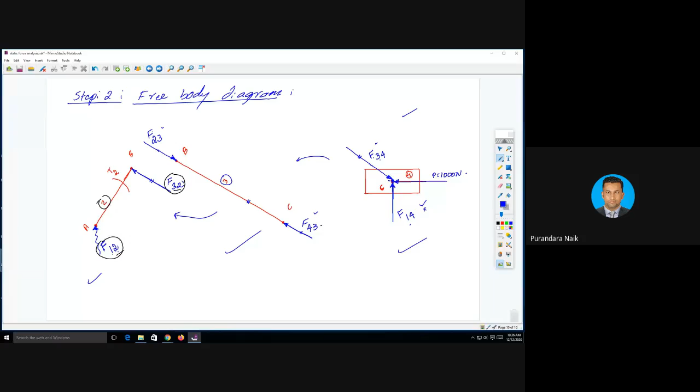In the previous problem, look at this: the force due to link number 3 on link number 2, we have shown it along the direction of link 3, because there was no force in between on link number 3. So that's why I showed F32 directly along link number 3. But here we cannot do that, because we have the extra force Q on link number 3. That's why the force due to link 3 on link 2 will not be along the direction of link number 3. It will be somewhere away.

So I'll show this force. I don't know the direction and I don't know the magnitude. F32, that is the force due to link number 3 on link number 2. Why have I shown the zigzag line? Because I don't know the direction or the magnitude. Why don't I know the direction? Because there is an extra force acting on link number 3. That's why I cannot identify the direction of F32 or F23. So it is an unknown direction.

20 degree. Yes, 20, exactly. I will take a 20-degree angle. So just take a reference line anywhere; you can take it anywhere, no problem. After taking the reference line, please concentrate on this problem, otherwise it will be difficult; it is somewhat complicated. I'll mark a point here and draw a 20-degree line.

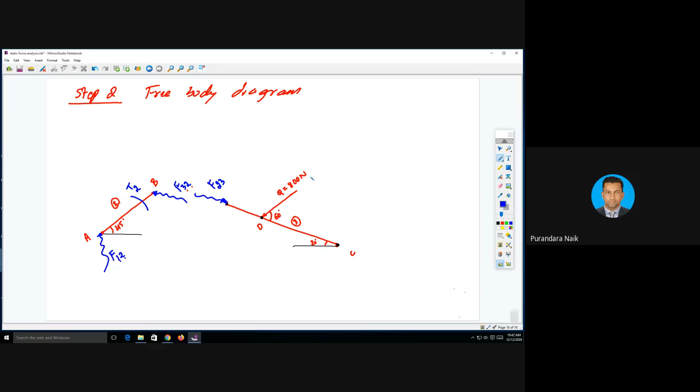If there is no Q, then C would be in the direction of link number 3, right? Like this. But it is not like that, because we have extra force here. That's why here also we have an unknown force F. Which link is connected to the point C? Link number 4, right? You see the previous slide. Link number 4 is connected to C.

So what is the force acting on link number 3? That is F43, force by link number 4 on link number 3. I don't know the direction, I don't know the magnitude. So zigzag line. It is similar to the previous problem, but due to Q, the direction of F23 and F43 will be unknown.

Copied? Hello? Hello? Finished? Yes, sir. Okay. Any doubt? Any doubt?

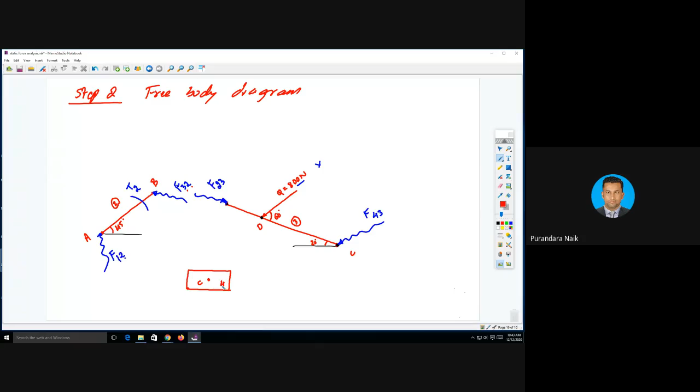What else is remaining now? Piston is remaining, right? Fourth one. So I will draw the piston now, fourth link. Yeah, this is the piston. Link number 4, and the point C is here. Now, what are all the forces acting on this link? One is P, applied horizontal force. What is the P value? P value is 2000, right?

2000 Newton. Another force: here you see the link number 3, we have F43. The same amount of force, opposite force, acting on link number 4. That is also unknown direction. I will show it as unknown direction. Look at this. You can show it anywhere, no problem, because it is unknown direction. So F34, due to link number 3 on 4.

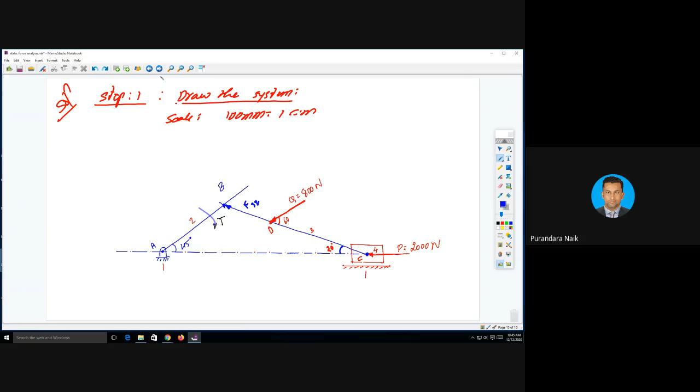Next, one more force, the upward force. We will be having one more force in the upward direction, exactly vertical. So I'll show it in the free-body diagram. This direction is known. What is the force? This is the force due to link number 1 on link number 4, F14. What is the indication of F14? Force by link number 1 on 4.

So this is the free-body diagram of link number 2, link number 3, and link number 4. I have shown all the forces and their directions. Right? Here, look at this. We know the direction of Q, direction of P, and direction of F14. We know the magnitude of Q and P, but all other directions and magnitudes are unknown. We need to start solving the problem. Unknown things we need to find out.

Because what is the target? You need to find out the value of T2. To find out T2, we need to find out F32 and F12. If you know F32 and F12, you can find out T2. Because link number 2 is a two force member with a single torque. What is the condition for two force member? Both forces will be equal, opposite and parallel. So F32 is equal to F12.

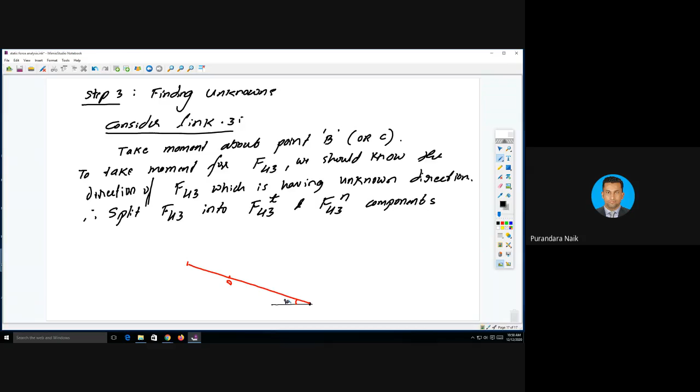This is a point. 20 degrees, correct? 20 degrees, 6 centimeter length. This is 2 centimeter, D. Correct? So this is B, C. Okay, so we have unknown force zigzag. This is F23, correct?

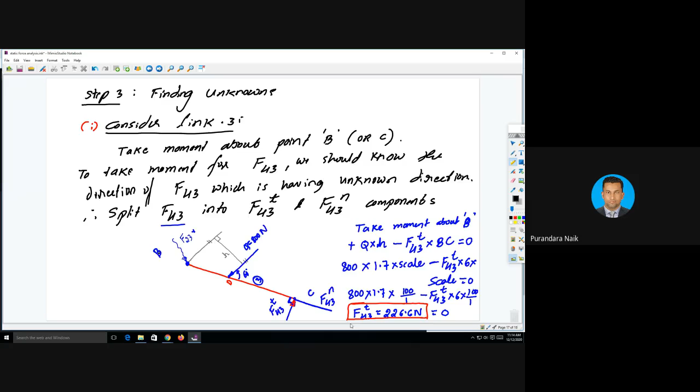Normal component is always along the direction of link. So this is the horizontal line, right? You just draw the horizontal line. See, normal component. Where is the normal component? Along the direction of the link number 3. So here also in the fourth link, along the direction of the link number 3, which is nothing but 20 degree, correct? Draw 20 degree line.

So this force, I know the direction, but I don't know the magnitude. So this is the direction. But I don't know exactly whether it is upward or downward. Just leave it. This is F34, not F43. The previous case we have taken F43. But here it is acting on link number 4. That's why it is F34 normal. This direction is normal. Here also it is normal. Same direction.

Now, where is the tangential? See, tangential component is perpendicular to normal, right? There it is upward. In this case, it is downward. Downward means like this. This is F34 tangential. Why it is downward? Because it is perpendicular to F normal.

What I'm going to do is I'm going to take a piston. I'll show F14 in the upward, P in the horizontal direction. Next, I'm going to take a horizontal line. Then I'll take a 20 degree line because it is the indication of link number 3. Then I'll take F34 normal along the direction of 20 degree line. Then I'll take one more force that is perpendicular to normal, that is F34 tangential.

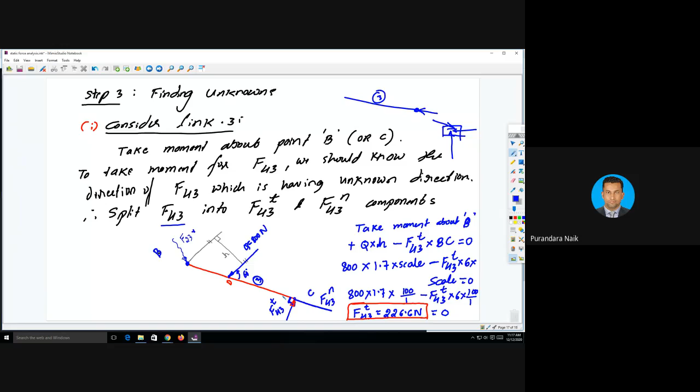Why is the tangential downward? Because it is opposite to F43 tangential. Why? Because it is reverse, right? In the previous problem, link number 3 and link number 4 are like this. Previous problem, you just check it. So if the force is acting like this, then in this fourth link it will be opposite, correct? So same thing I'm going to do. Here it is upward, I'll take this downward in this case. But normal force, I don't know the direction, you just leave it. Any doubt in this case?

I have split F34 into tangential and normal, by referring to the previous link, link number 3. Link number 3, we have shown F43 normal, F43 tangential. Same thing we have to copy, but direction is different. That's all. Any doubt in this problem? Or in this case? Hello? Any doubt in this case?

ಯಾರಾದ್ರೂ ಮಾತಾಡ್ರಾ? No, sir. Any doubt? ಇದೆಯಾ? ಯಾರೋ ಮಾತಾಡ್ತಿದ್ದಾರೆ, don't hesitate. If you have any doubt, you can ask. I can clear it. ಋತ್ವಿಕ್, any doubt ಇದೆಯಾ? No, sir. No. Shall we proceed?

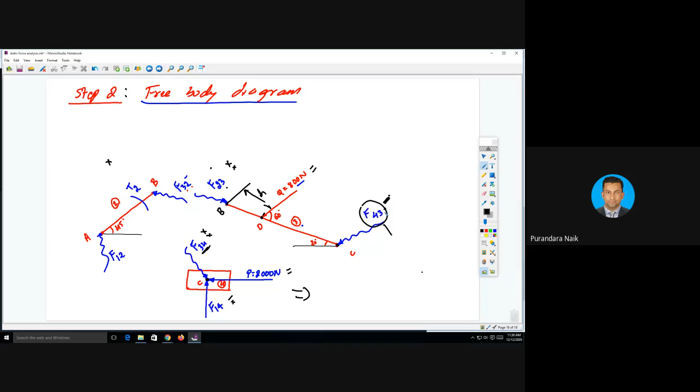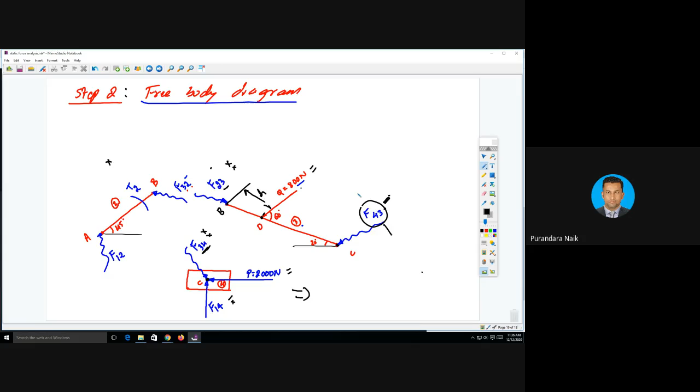You go to the previous slide. F34 is known. F34 is nothing but F43. If you know the value of F43, direction is same as F34, direction and magnitude. If you know F43, you can find out F23 because link number 3 will be a system with three force members: this, this, and this. So you know how to do the equilibrium for a three force member, right? So I'll do it.

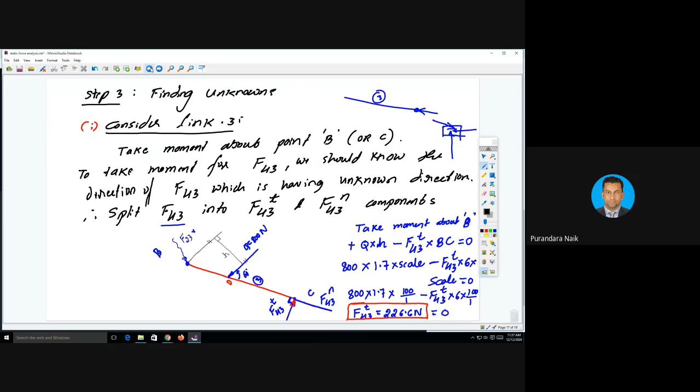Step 3. Consider link 3. We need to consider link 3 again. So F43 is equal to F34 is equal to, what is the answer for F34? 2250 Newton. What is the direction? Here it is upward. Why? Because in the fourth link it is downward, but in the third link it will be upward. Okay. Now you come back to the third link, link number 3.

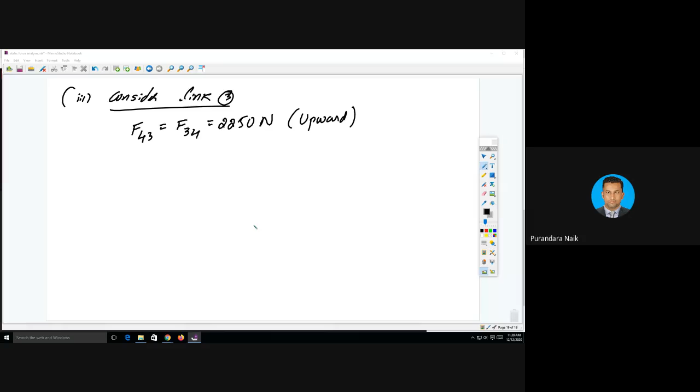So this is link number 3. B, this point is C, this is 20 degree. The length is 6 centimeter, right? This is C. We have a force F43, upward. So what is the angle here? Just measure the angle. How to measure it? Just draw a horizontal line and measure this angle. Check it. Theta. What is the answer for theta?

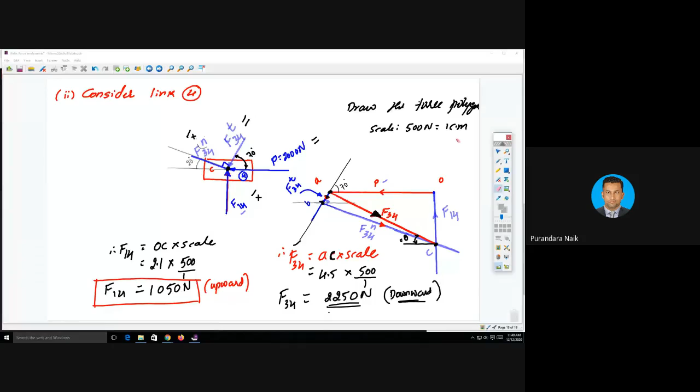Saiban, can you tell me the answer? Yes, sir. Doing, sir. Manjunath R. Manjunath is there? Jitesh? Jitesh, am I audible?

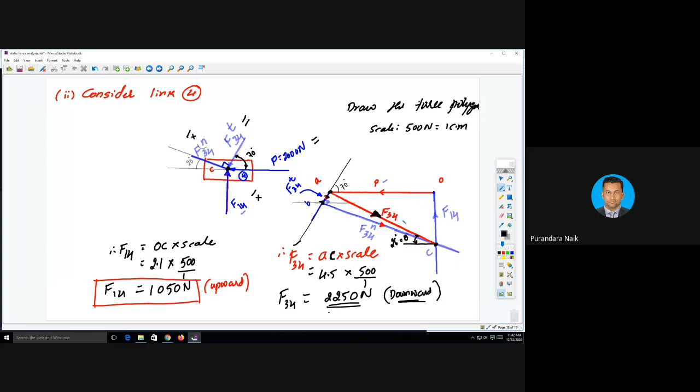Okay, can anyone tell me the answer for theta? 26 degree. Okay. I'll take 26 degrees. Here D, this is D, 60 degree. So here I don't know the force. This is F23. Here I know the force, that is F43, at an angle of

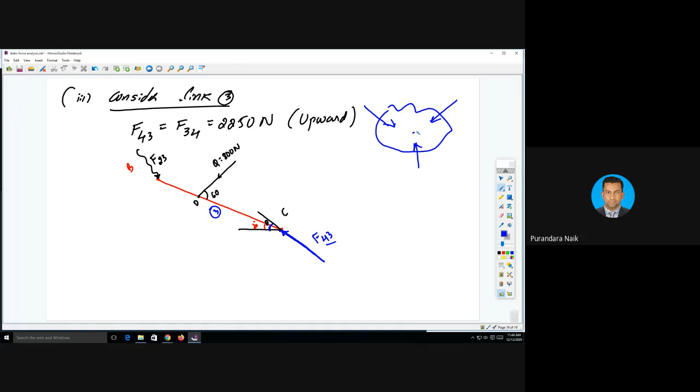Okay. Now, in this system, link number 3 is a 3-force member, that is F43, Q and F23. A body with 3 forces. What is the condition? Here we have 3 forces. These 3 forces must be concurrent at a point; they have to intersect at a point. What is the second condition? Summation of all the forces must be equal to 0. If these 2 conditions are satisfied, then the system will be in equilibrium.

Here we have 3 forces. We need to find out the point of concurrency. How do you find out the point of concurrency? Look at this, I'll do it. I'll extend this line. Which one? F43. Okay, write down below this: link 3 is a member with 3 forces.

Therefore, for equilibrium, all 3 forces must be concurrent and summation of all the forces must be equal to 0. That is, the force polygon must be closed. So if you apply these 2 conditions, we'll get the value of F23. Okay, how to find out the point of concurrency? Write down below this: to find the point of concurrency, POC.

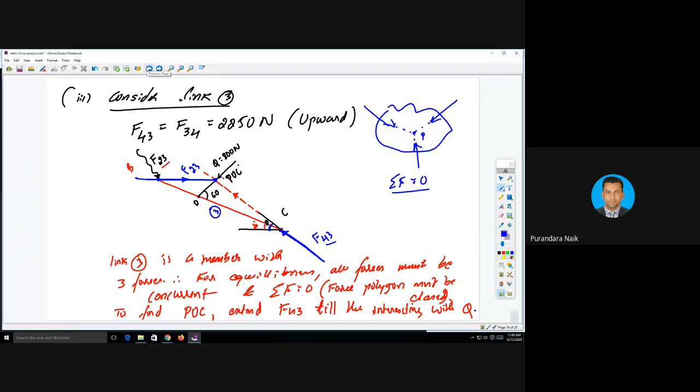What is the scale you need to take? Q is 800. F43 is 2250. 2250 means 500 is equal to 1 centimeter. First, F43.

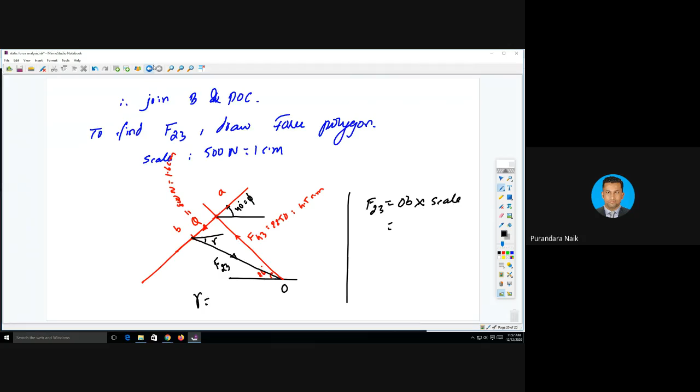Hello? OB length? 5.4. 3.4. Exactly. 5.4. Huh? 5.4. 5.4. Okay. 5.4.

Into scale is 500. Answer F23. 2700 Newton. Yes, sir. Correct? This is actually downward, right? Downward. So next step, all of you copied?

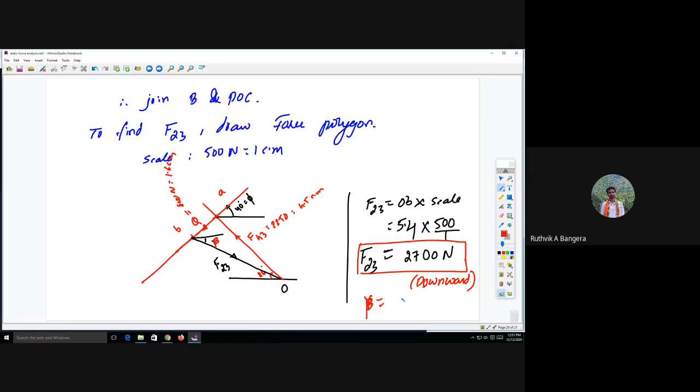Now what is the gamma angle? Angle gamma is very very important here. What is the angle gamma? Or you can take it as beta, no problem. Gamma or beta, no problem. I'll take it as beta. Okay, what is beta angle? What is beta? 11 degree. Okay.

Next, so here we have a force, right? F. This is link number 2. F32 is equal to F23. So therefore, write down F32 is equal to F23. F23 we have found, that is F23 is equal to 2700. F23 is equal to F32, but it is opposite in direction. Downward, so it is upward. Because here we have taken it as downward.

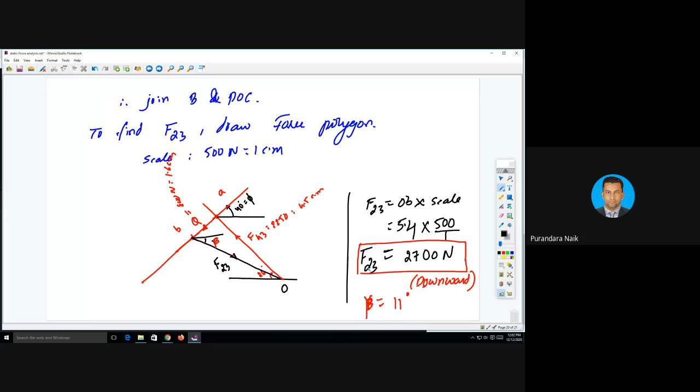It is upward now. So F23 upward means, I will take a reference line here on the vertical line. Horizontal line. So gamma or the beta is 11 degree. Take 11 degree line. So this is my 11 degree line. Take beta is equal to 11 degree. So this is the force F32. It is opposite to F23.

So here we have a torque T2. And we have one more force, F12, but it is a 2-force member, right? Write down the comment here. Link 2 is a member with 2 forces, F32 and F12, and a torque T2. What is the condition for static equilibrium? A member with 2 forces and a torque, same as the previous problem. These two forces are equal and opposite.

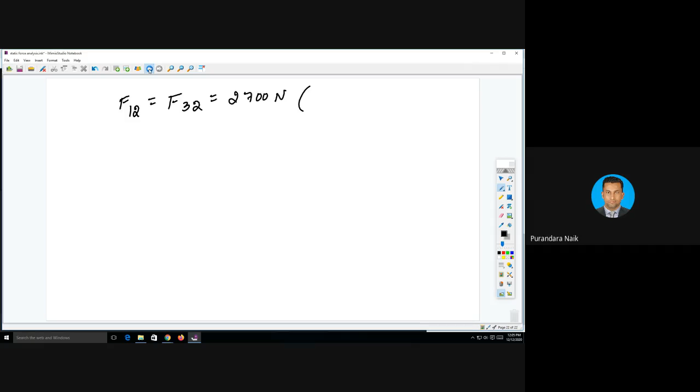F32 and F12 are equal, opposite and parallel. Correct? Equal, opposite and parallel. Therefore, you can write it as F12 is equal to F32 is equal to 2700 Newton. F32 is upward, F12 is downward. Correct? Please copy this, do it fast. Only the first 2 steps are important, then you can continue.

Finished? Next, second condition: the couple formed by F12 and F32 is given by, C is equal to F12 into H1 is equal to F32 into H1. What is the value of H1? How to find out H1?

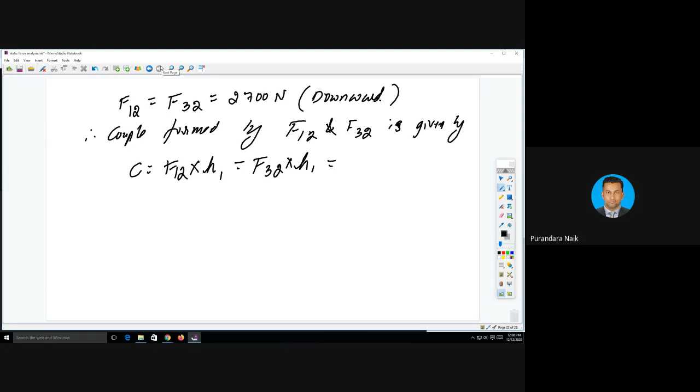F12, what is the value of F12? It is 2700 into H1 value. Can anyone tell me the answer for H1? Finished? Can anyone tell me the answer for H1? Hello? 2.3. Okay, into scale, equal to 2700 into 2.3 into scale, 100 by 1.

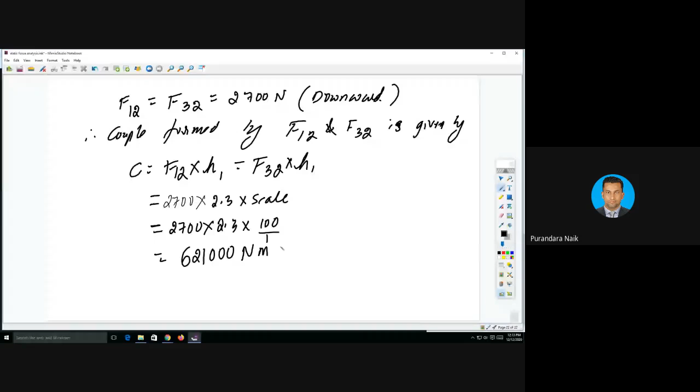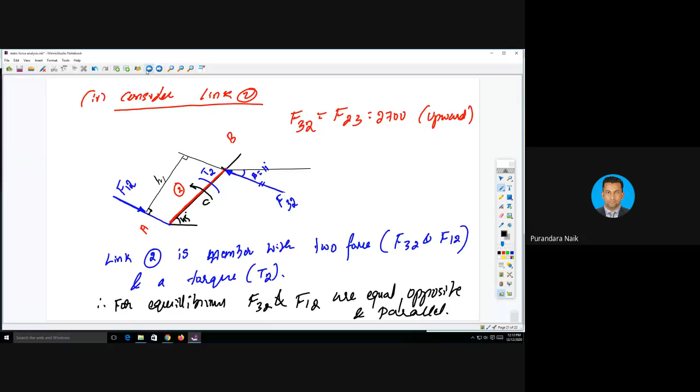Clockwise or counterclockwise? You check this. The force is like this and this force is like this. So the couple C is counterclockwise. Show it in the figure also, okay? Therefore, the last step, C is equal to T2 is equal to 621 Newton meter clockwise.

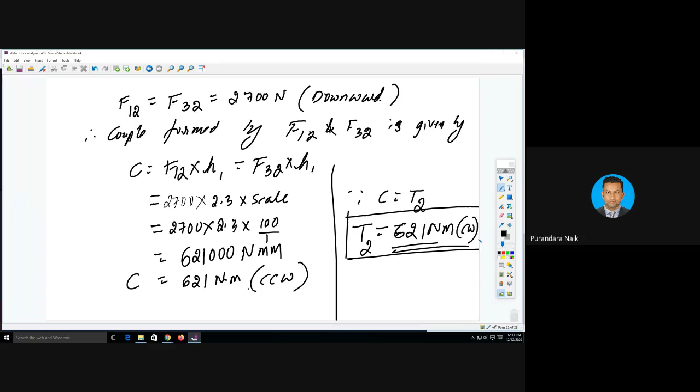Finished? Yes, sir. Okay. There are so many problems. The next problem, I'll just give you the question and we'll do it in the next class. Problem number 3, correct? Please copy this problem. Also a typical problem. It is asked in the previous question paper.

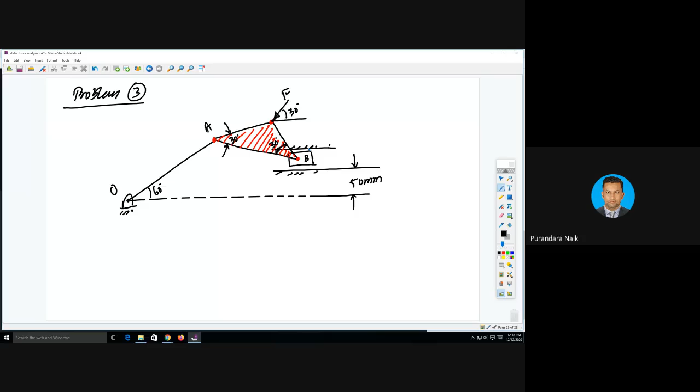Copy this. Angle is 30 degree. A, O, this is 60 degree. B, this point is C. For the mechanism shown, find the required input torque for static equilibrium,

lengths OA and AB are 250 mm and 650 mm respectively. Force F is equal to 500 Newton. These are the details given in the problem. This will be the last problem on the slider crank mechanism. Copied?